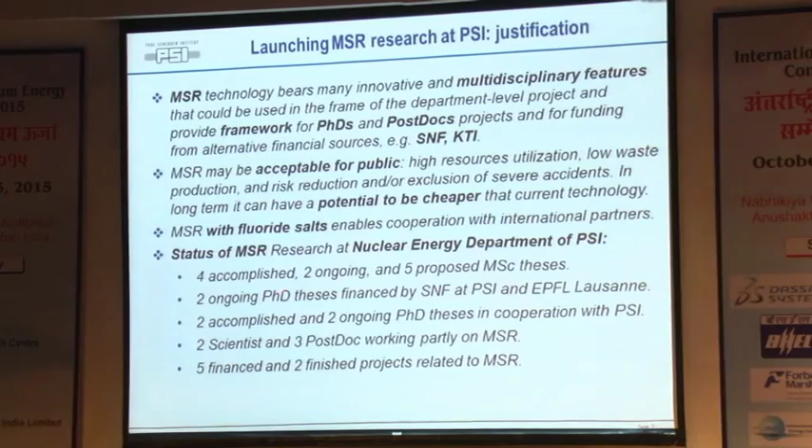The current status is that we have several master students working on MSR. There are 2 ongoing PhDs sponsored by the Swiss National Science Foundation. Actually, it's the first time in history that the Swiss National Science Foundation has paid money for nuclear research, so there is something on MSR from that point of view.

Some PhDs visited PSI in the last 3 years working on MSR, and 2 scientists and 3 postdocs are partly working on MSR, with 5 financed and 2 finished projects, which are more or less here.

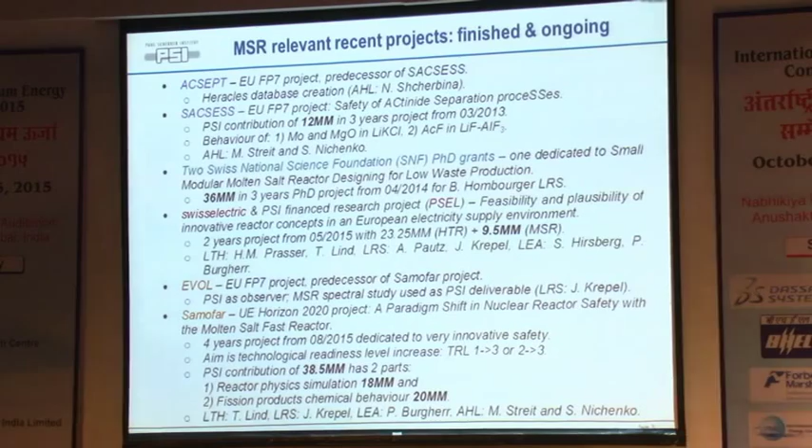We are involved in separation processes through the European projects ACSEPT and SACSESS. We have some competencies in molecular dynamics and thermochemistry using the in-house code GEMS.

There are 2 Swiss National Science Foundation PhD grants, one of them explicitly dedicated to small modular molten salt reactor design for low waste production. There is a consortium of Swiss utilities supporting a project on the feasibility and plausibility of innovative reactor concepts, where MSR accounts for about one-third.

Then there are 2 projects dedicated to MSR safety and design: EVOL, which finished a year ago, where we have an observer, and now the big European project SAMOFAR, where we are a member of the consortium. But I will present the SAMOFAR project on Wednesday.

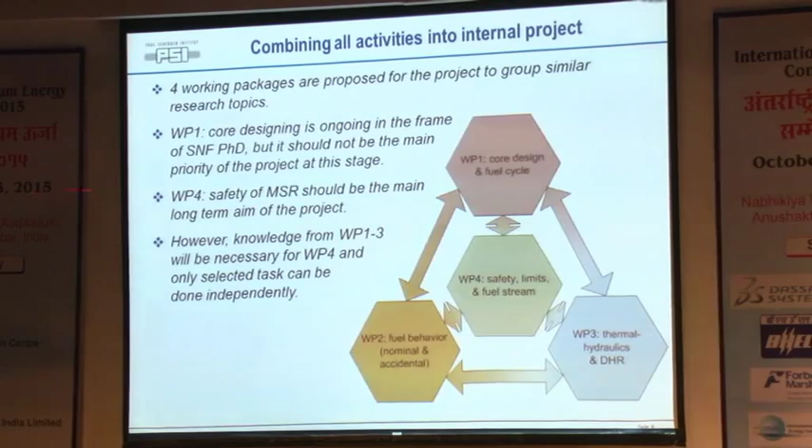So we tried to combine all these efforts into an internal project, and we decided to define 4 working packages. The first is core design, but it should not be the main objective, we don't want to be a designer. Our main objective should be safety, but before you can evaluate safety, you need to know many things. You need competencies in the other 3 working packages: fuel behavior, meaning the chemistry of the fuel, and thermohydraulics and decay heat removal.

Especially these 2 can be looked at independently of design, so to say. If you just define the salt type, you don't need to know the exact design of the reactor, and you can still do some research.

Even though working package 1 is not the main objective, we have the most results at the moment in this area. It is once again sponsored by the Swiss National Science Foundation, and we have already decided that we would like to focus on fluoride salts.

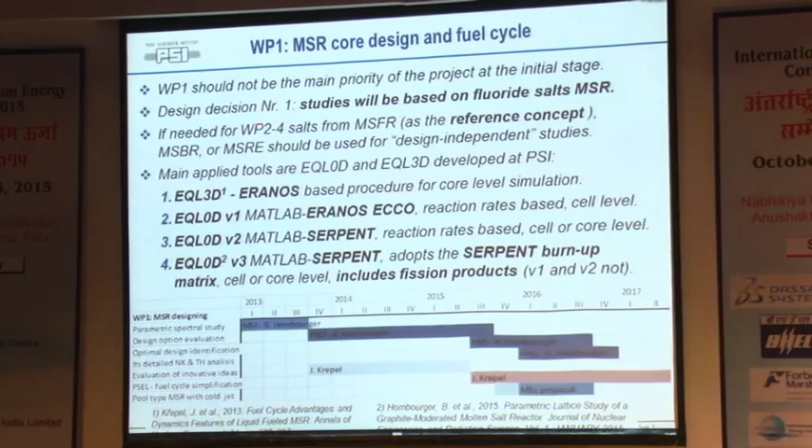Our main tool in this working package is the equilibrium cycle procedure. We have one procedure called EQL3D, based on the deterministic code ERANOS, which can simulate 3D distribution of burn-up in a core. And then there are 3 versions of equilibrium 0D, based on either ERANOS or Serpent, coupled with MATLAB.

In the first two cases, it's coupled through reaction rates only for actinides, without fission products. In the last version, MATLAB and Serpent are coupled through the Serpent burn-up matrix, and it includes fission products. All these routines are used to obtain an equilibrium cycle: you simulate with a fixed reprocessing scheme for more than 100 years until you reach an equilibrium fuel composition. I'd like to give you a few examples, since here we have the most results.

One example will be calculated with EQL0D. As I said, it's a MATLAB script that takes the burn-up matrix from Serpent. It uses the Chebyshev rational approximation method, like Serpent does, so the same method, but it couples media, so it's a multimedia coupling. This means that, for instance, this is the burn-up matrix for the fuel salt, but thanks to the off-gas system, you're continuously removing some elements from the core, and they appear a few lines lower in the matrix, for the off-gas system. You're explicitly solving these two matrices together.

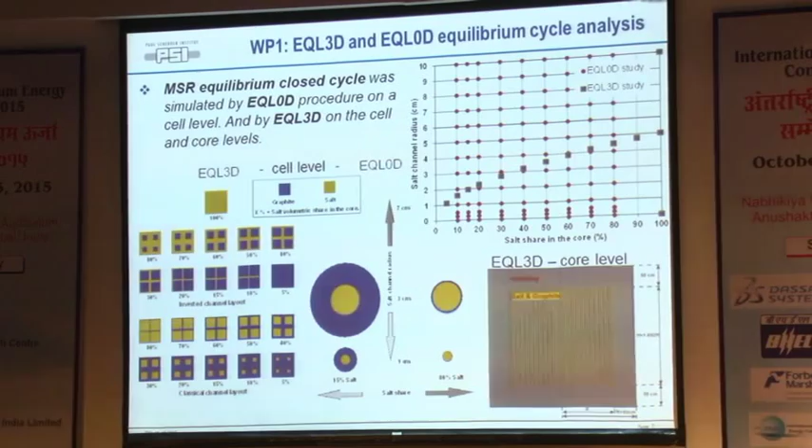What we looked at was K infinity, the infinite multiplication factor, for the equilibrium fuel composition. The results are shown here. As you see, EQL0D provides a surface in the space, while EQL3D gives only one curve. This is more or less the reactivity excess for equilibrium fuel, so you can assume from this excess how well the core can breed. You can also see there's a kind of 'valley of death,' as some call it.

This is because the reactor is running in the resonance region, giving really bad composition of the actinides. You also see that if you increase the salt channel radius, it improves. So one idea was: what happens if you go further, up to say 1 meter? You can see that here, up to 1 meter. We found that from about 50 or 60 centimeters diameter, each channel starts to act almost as an independent reactor.

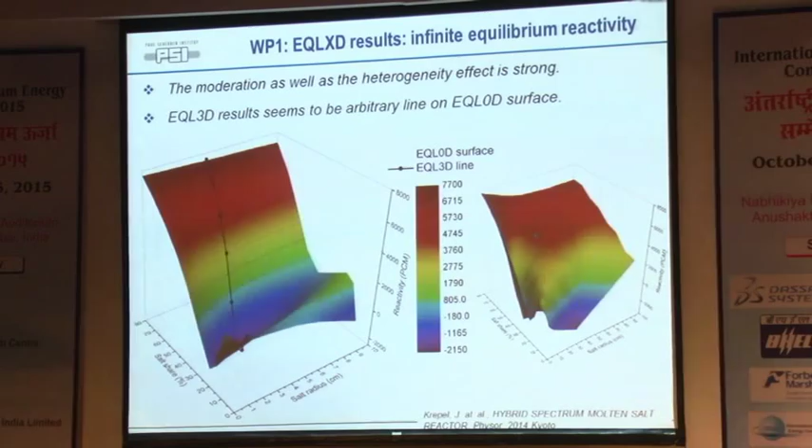This led us to an idea that you can combine thermal and fast spectra, because this channel is very thermalized at the periphery and very fast in the middle. We came up with a hybrid spectrum core. So imagine a normal fast MSR, just a cylinder with salt surrounded by hastelloy. We then tried adding in the middle a graphite-moderated lattice and a zirconium hydride-moderated lattice.

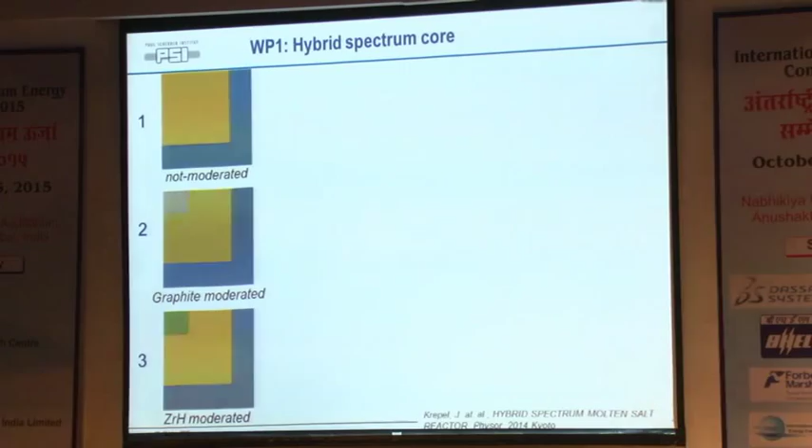The idea was that you would need less fissile inventory at the beginning, and you may reduce the fluence on the wall, because the outer salt would be subcritical. We looked into it, and there are some results to present.

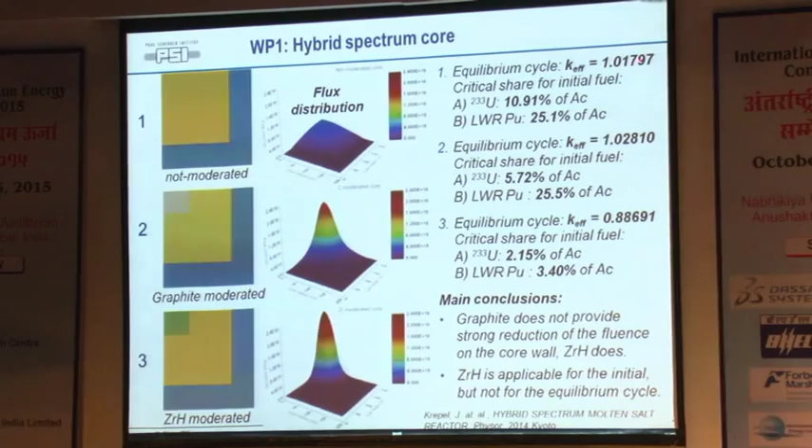The equilibrium K effective for the base case is 1.017. If you add graphite in the center, it's 1.028, so slightly better. But with zirconium, it doesn't work—the hydrogen absorbs too many neutrons, so the equilibrium doesn't work.

On the other hand, the initial load of uranium-233 was 11% in the fast core, 6% in the graphite-moderated case, and only 2% in the zirconium hydride-moderated case. It's similar for the LWR plutonium vector, where graphite even slightly worsens the situation, surprisingly. But zirconium hydride is really good, with 3.4% plutonium share. This means you cannot use zirconium hydride for equilibrium, but you can use it for plutonium burning, which is the case of, I think, Transatomic, a spin-off of MIT.

In these two cases—in this case you cannot reduce the fluence on the wall, but in this case you can already reduce the fluence on the wall. Unfortunately, you cannot use this for high powers, because all the energy will be produced in the central zone, so probably you cannot produce the same power as in this case.

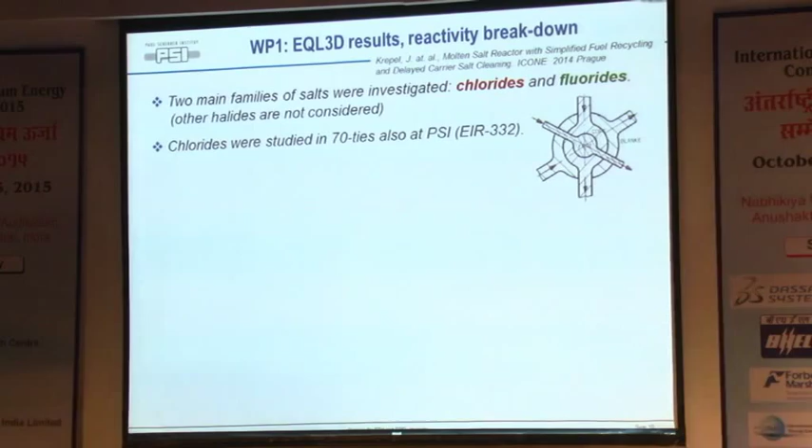Another thing we analyzed was the reactivity breakdown in equilibrium. Following the EQL3D study, you have one line from fast MSR to thermal MSR, and we analyzed why the reactivity behaves as it behaves. In this case we included chlorides to get a feeling about chloride salts. We also did some studies at PSI for chloride salts.

So those were fluorides in the thorium cycle. We looked also at chlorides in the thorium cycle for two cases: only fast spectrum with enriched chlorine-37, and natural chlorine. As you can see, especially the enriched one is better—it has higher excess reactivity at equilibrium.

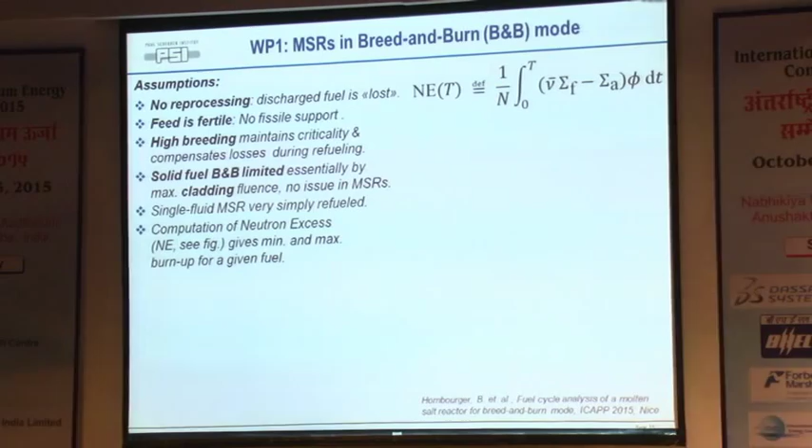Since we saw that the chlorides are very nice at the cell level, we looked at the breed and burn scenario—a possible scenario where you remove the salt, throw it away, and replace it with fresh salt. The same as you do in a traveling wave reactor, but in this case with homogeneously mixed fuel. We were watching the net neutron excess, in percent of neutrons you have in the system compared to the percent of fissile material burn-up.

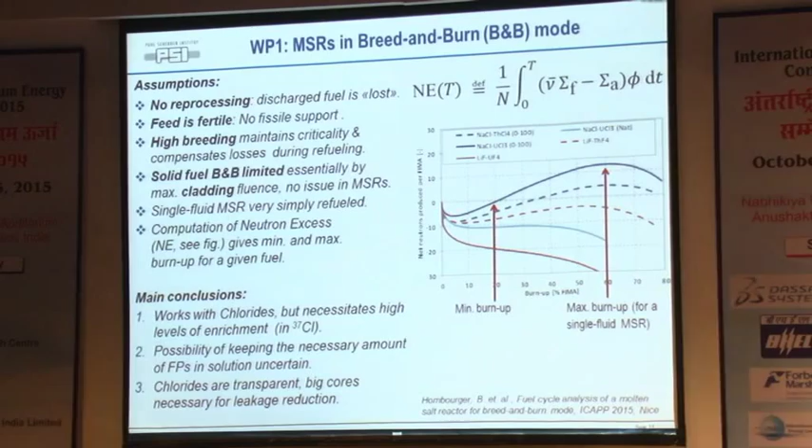These are the curves for fluorides and chlorides, for the thorium-uranium cycle and the uranium-plutonium cycle. You see that the only thing which really works is the chloride salt enriched with chlorine-37 in the uranium-plutonium cycle. Here, after 20% burn-up, you become critical, so the neutron balance becomes neutral, and then you have excess neutrons for a long time. The others don't actually work.

Unfortunately, the thorium cycle in fluoride salts is close to zero balance, but slightly below. Of course, here we should be sure that it works—this is a theoretical study. Nobody can say we can reach 40-50% burn-up without having troubles with fission product solubility in the salt. But if you apply these results at the core level, we didn't succeed—the core should be extremely big, or you should go to a blanket solution.

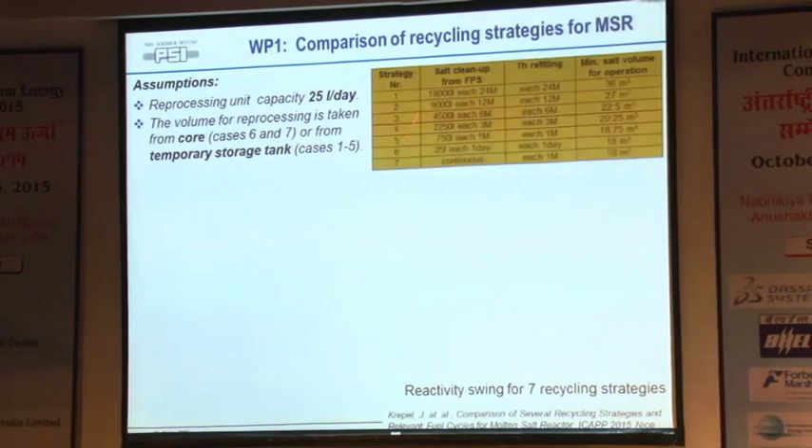One of the last examples for working package one is recycling strategies. We assume that if you have a reprocessing unit with 25 liters per day capacity, you can use this unit to operate the reactor in different recycling schemes. You can continuously remove the salt, or remove 25 liters once per day, or 750 liters per month. Or, in an extreme case, assuming a reactor of the MSFR type with 18 cubic meters in the core, you remove it every 2 years.

All these operations correspond to an equivalent of 25 liters per day. In this case you need another salt to put into the reactor, and then you have 2 years to process the previous salt—so you need twice the volume of the primary circuit. So we find the behavior, this time again for the equilibrium cycle.

So you launch the equilibrium cycle without fission products after cleaning. And first of all, we find that the reactivity swing is positive, so the reactivity grows with burn up.

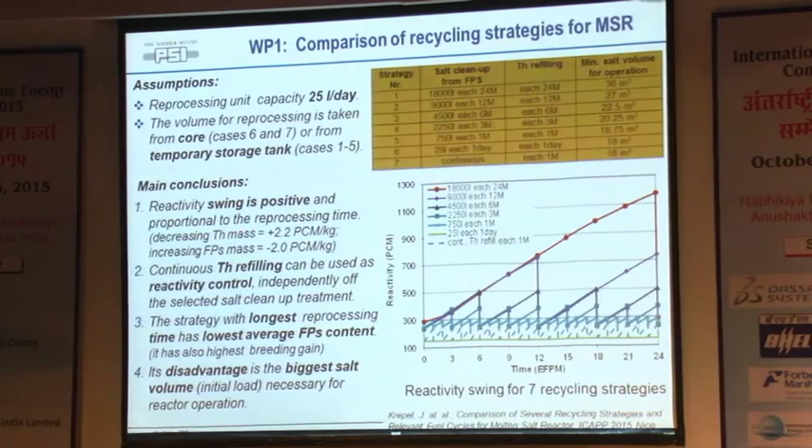It is because the thorium capture, thanks to decreasing thorium mass, is producing like plus 2.2 PCM per kilo, whereas the fission products, also because we have an off-gas system, have only minus 2 PCM per kilo. So the reactivity is increasing.

Another thing you can see is that the average amount of fission products in this case is the best, because the salt at the end always has the same fission product content. But this case starts from 0 to the maximum, whereas the continuous case is always operated at the maximum, because the salt you are removing has the same fission content amount.

So basically this case is the best for breeding. Continuous reprocessing has no meaning from a neutronic point of view. You should do it batch-wise. Of course, you pay for this by doubling the amount of salt to operate the reactor, but it improves the breeding.

I think the load is disadvantaged, but another thing is, since the thorium has a negative worth, you can eliminate this reactivity swing by continuously adding a little bit of thorium. Then you will have a flat reactivity swing and all the advantages from higher breeding.

The last example from the WP one, we call it simplified fuel recycling. There are many methods for how to clean the salt, how to reprocess it. But all of these schemes usually start with volatilization, so you remove uranium, neptunium, or plutonium out of the salt in the form of volatile hexafluorides, thanks to fluorine bubbling through the salt.

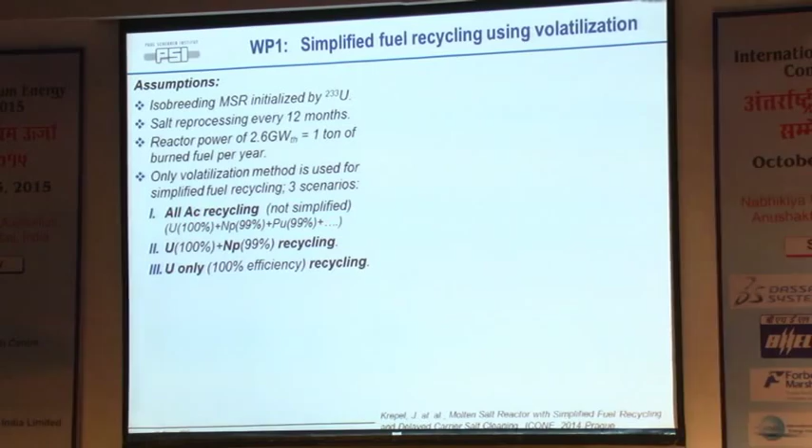So we decided to check what happens if you compare full recycling, recycling all actinides, against recycling only uranium and neptunium through volatilization, or only uranium. We compared these cases by the cumulative waste during 100 years of operation, starting from a uranium-233 thorium mixture.

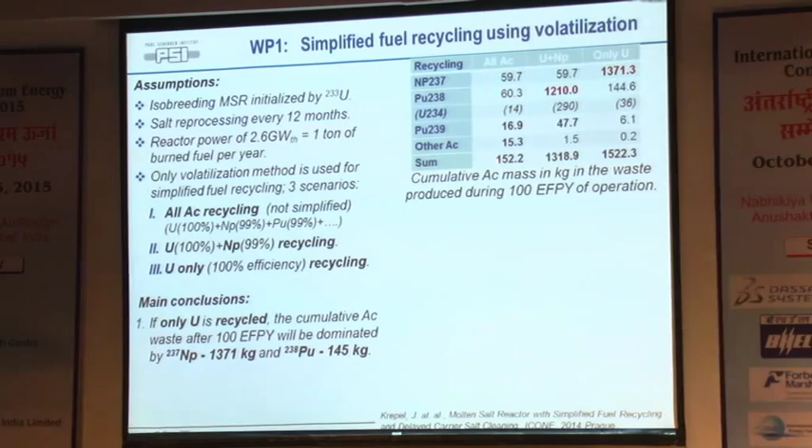This is more or less the result in the three cases. In the first case, where you recycle everything, those are just reprocessing losses. So for these isotopes, you have this amount of actinides after 100 years of operation. The power of the reactor was set to 2.6 gigawatt thermal to have just 1 ton of fissile material fissioned per year.

If you recycle uranium and neptunium, then the neptunium amount is the same, but you suddenly produce much more plutonium-238 in the waste, like 1,200 kilos, more plutonium-239, but less of the higher actinides.

If you recycle only uranium, then you have 13 or 1,400 kilos of neptunium, twice more plutonium-238, but much less plutonium-239, and almost an order of magnitude less of other actinides.

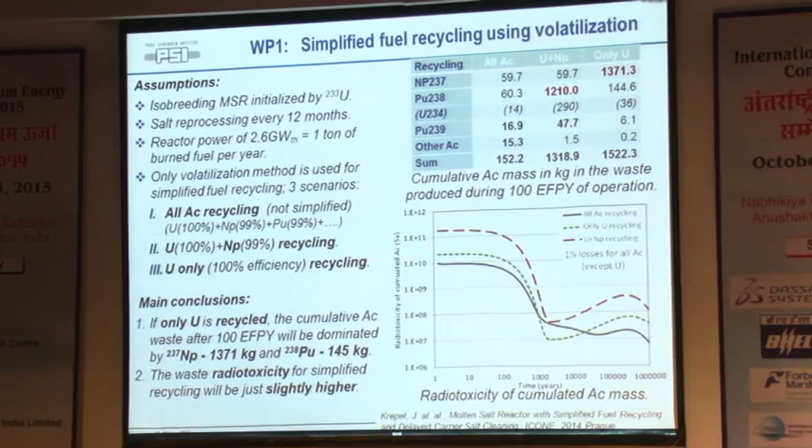The third case, when you recycle only uranium, is twice as worse at the beginning because we have twice more plutonium-238. But in the middle part, which is driven by the higher actinides, it's much better. And at the end it's again worse because we have much more neptunium-237, which starts to decay roughly here, because the half-life is 2 million years.

So maybe chemists and proliferation experts should look at this and choose what is best for them. But the case when you recycle only uranium and discharge the rest is relatively appealing. Or at least you can recycle uranium and store the rest for 10 years, wait for the decay of the uranium-232 products, and then you may reprocess it because it will be less active.

Okay, so back to the project. Work package 2 is dedicated to fuel behavior at nominal and accidental conditions.

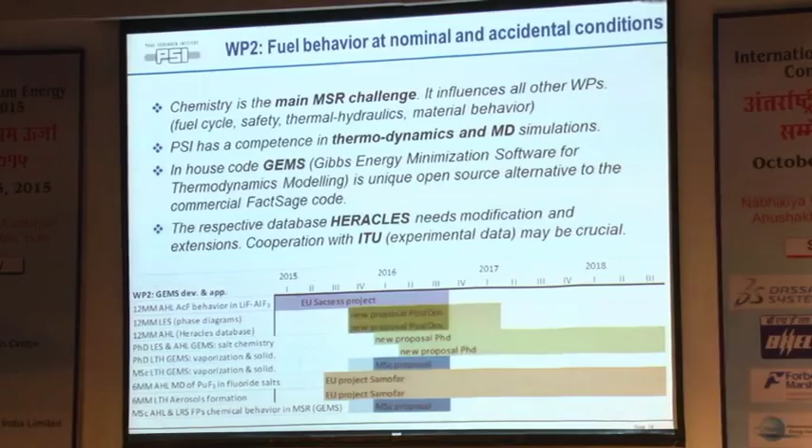We are a member of the SAMOFAR project, so some of the work is in that frame, but we have some expertise in molecular dynamics simulation, and we have an in-house code, GEMS, Gibbs Energy Minimization Software for Thermodynamics Modeling. In the frame of the SACSESS reprocessing project, the Heracles database was modified for chlorides and fluorides, but for application to molten salt reactors we still need to extend it. Some new mixing models should be included, and so on, and we hope to cooperate with ITU Karlsruhe in this direction.

Just for illustration, this is the structure of the GEMS code. There is also a kernel, a kernel which is C++, which can be coupled with multi-physics tools.

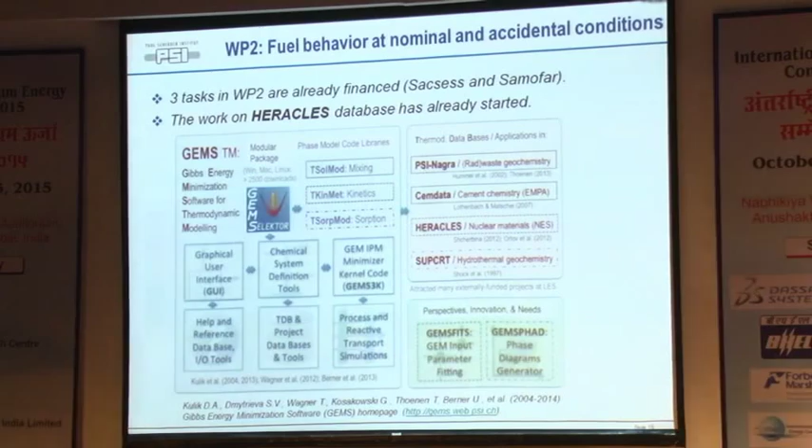So once we have the database, I can imagine we will couple this with a multi-physics solver, for instance in OpenFOAM, or it's already done now for final repositories. They use this kernel to solve the distribution in final repositories.

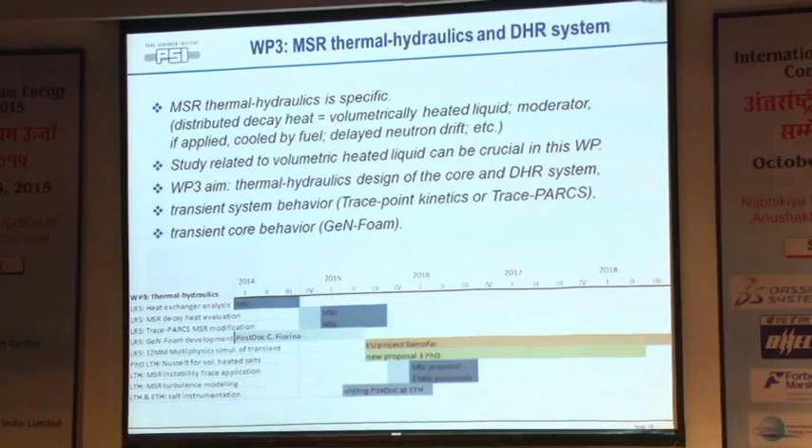WP3 thermohydraulics. Of course, thermohydraulics of a molten salt reactor is special. Everybody knows there is distributed decay heat, so volumetrically heated liquid. We would like to look at the volumetrically heated liquid study to find a new correlation of the heat exchange between the liquid and solid wall.

But at the moment, we mostly focus on transient system behavior using TRACE or TRACE/PARCS code, or for core behavior using GeN-Foam, which is our solver based on OpenFOAM. A few examples: those are 3 master theses finished this year and last year.

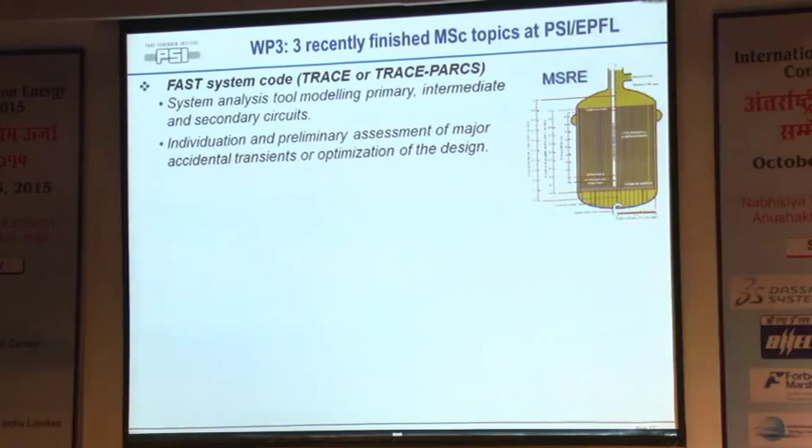Using TRACE/PARCS, we have been simulating the MSRE core. Using just TRACE, we looked at heat exchanger options, so shell and tube versus printed circuit. It showed up that the printed circuit is a very good option.

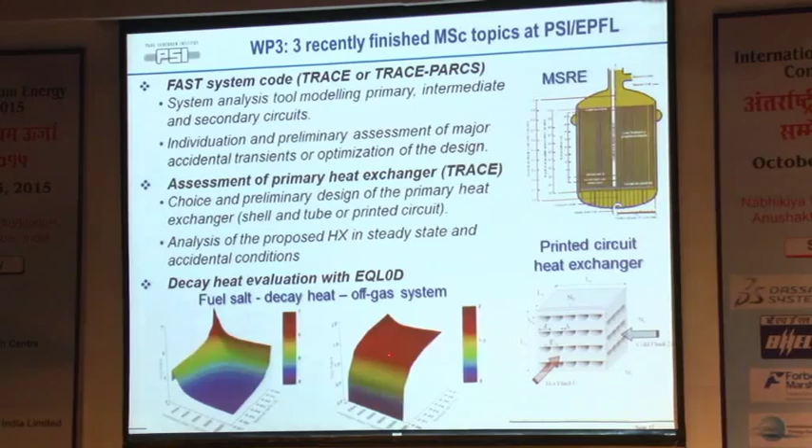Using EQL0D, which is more for the fuel cycle, we have been evaluating the decay heat release in fuel salt and in the off-gas system, as a function of the removal rate, so of the intensity of helium sparging or bubbling through the salt, against the burn-up. You start with fresh fuel, and with increasing burn-up, the decay heat content changes, along with the removal rate.

If you have a very fast removal rate, you have low decay heat in the core but high in the off-gas system. This is thanks to the coupled matrix; you can follow both systems.

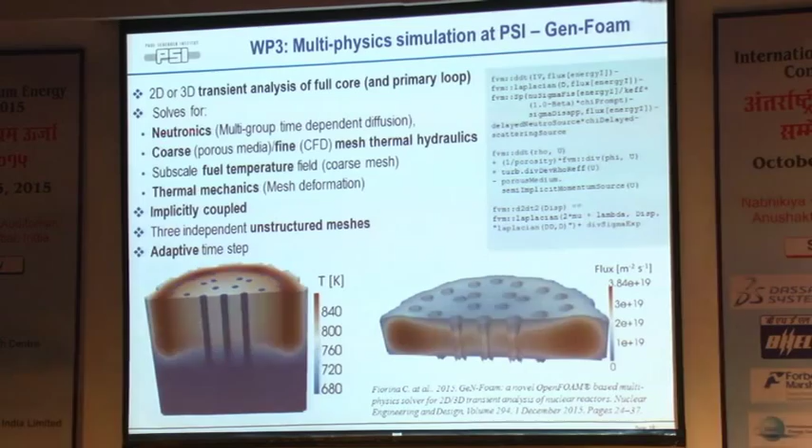For the core, for detailed core analysis, we have developed the GenFOAM solver. It was developed for the sodium fast reactor, but it already includes the delayed neutron drift model for MSR, so it's applicable. It solves 3 or 4 different physics: neutronics, using multi-group time-dependent diffusion on an unstructured mesh which you select; coarse using porous media or fine CFD mesh thermohydraulics; subscale temperature field; and thermal mechanics.

So you can simulate expansions. For instance, in the case of a fast reactor with assemblies, it allows you to simulate expansion of each assembly separately, so you get a really deformed mesh after all. Here you see the coding for GenFOAM, the equations which are solved more or less.

So this is also a kind of solver we have. It is based on open source code, and we are ready to share if somebody is interested.

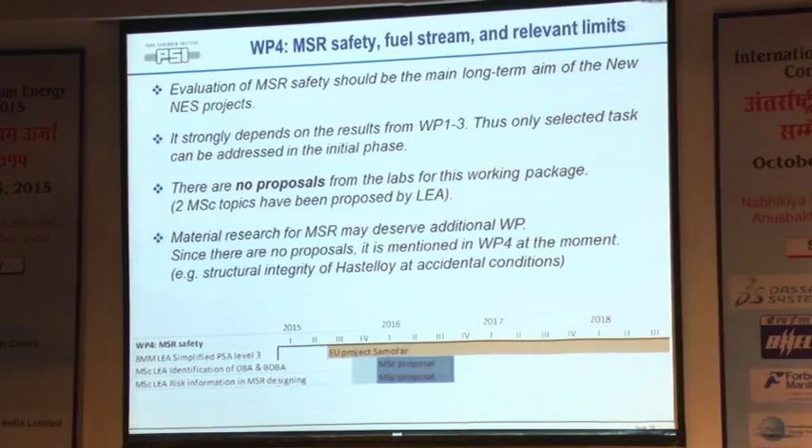The last working package, there is not much to say now because we need inputs from the others, so it will come later. But what is already there in the frame of the SAMOFAR project, we would like to do simplified PSA level 3, looking at what happens if you have, let's say, a release, how these components would get out from the salt and distribute around the power plant.

Okay, I think that's all from my side. Thank you very much.

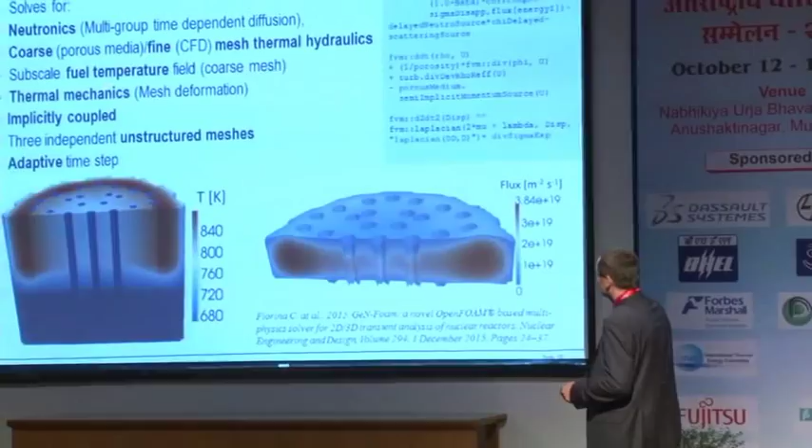In the slides for WP3, you mentioned implicit coupling. Can you elaborate a little bit on that? I'm not the main author, but I was sitting in the office with the main author. You have 3 independent unstructured meshes for the 3 different physics.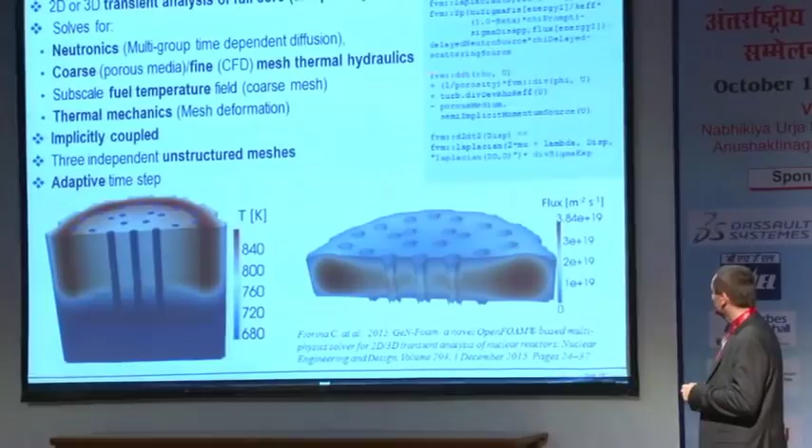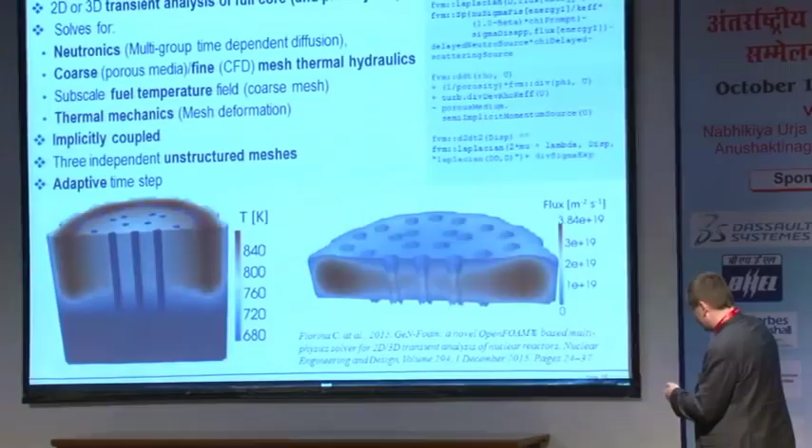More or less, you ask OpenFOAM to solve these three equations, implicitly coupled. I can give you the reference here, it's a very recent paper. You'll get the handouts later probably. It's by Fiorina Carlo. You can find it in this reference, or you can contact him; he's the main author and also the contact person for this tool.

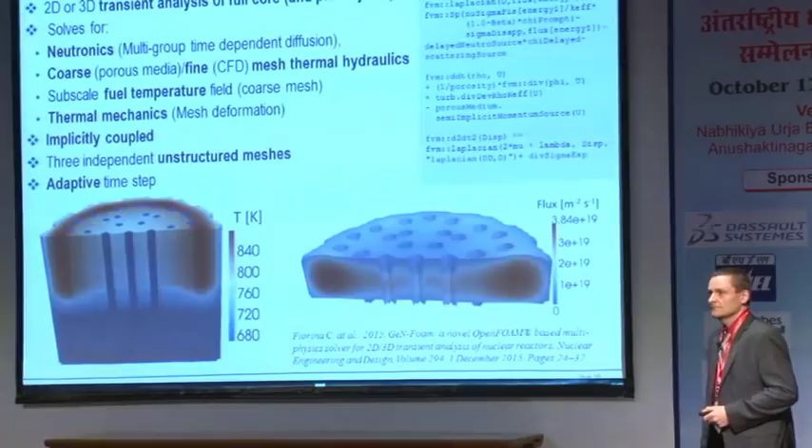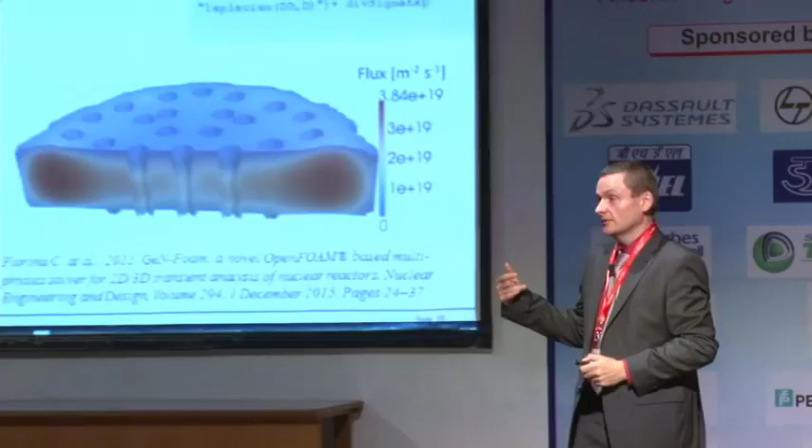When you said reprocessing of the fission products, did you mean only xenon and krypton? In the off-gas system, we simulate that xenon and krypton are surely removed, but I think not only that, also molybdenum is surely removed, and maybe a few others. But we didn't calculate or simulate this; we just based it on the Oak Ridge reports.

And the other aspect about recycling, would you recommend recycling all the actinides? Based on these results, I would recommend that if you have molten salt spent fuel, use volatilization to remove uranium, and the rest, which has no uranium-232 but still has its daughter, thorium-228, with a half-life of 2 years, so if you wait 10 years, you may reprocess the salt later. But you don't need to hurry, because what is inside the salt is not so valuable; there's no uranium, just a lot of thorium, and you don't care about thorium.

You don't care about neptunium either, but you have to store all these salts for a long time. So you can recycle uranium with volatilization as fast as possible, and the rest can wait 20 years, or be disposed of. It depends.